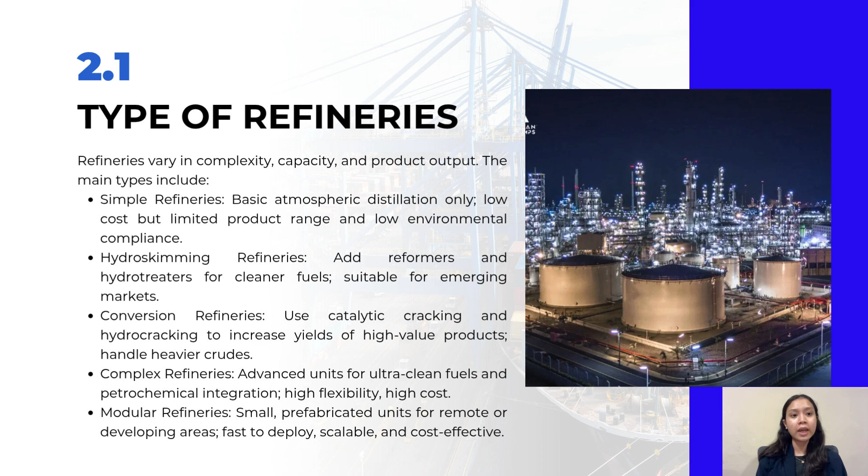Next is complex refineries, the most advanced type, combining features of the previous categories with additional units like alkylation and petrochemical integration. These are designed for high efficiency and strict environmental compliance. And lastly is the modular refineries, smaller prefabricated unit designs for remote or underdeveloped regions. They are cost-effective, rapidly deployable, and can be scaled up as demand grows.

Next, let's look at the key design aspects of modern refineries. Whether traditional or modular, design today is centered on improving efficiency, safety, and sustainability. Firstly, structural layout is critical for safe operations and future expansion. Traditional plants are spread out for hazard control, while modular refineries use compact, skid-mounted units for fast setup.

Next, process integration has advanced with energy-saving techniques like pinch analysis and hydrogen optimization to improve yield and reduce emissions. And lastly, digital technologies such as AI, digital twins, and model predictive control now help optimize operations, reduce energy use, and extend equipment life.

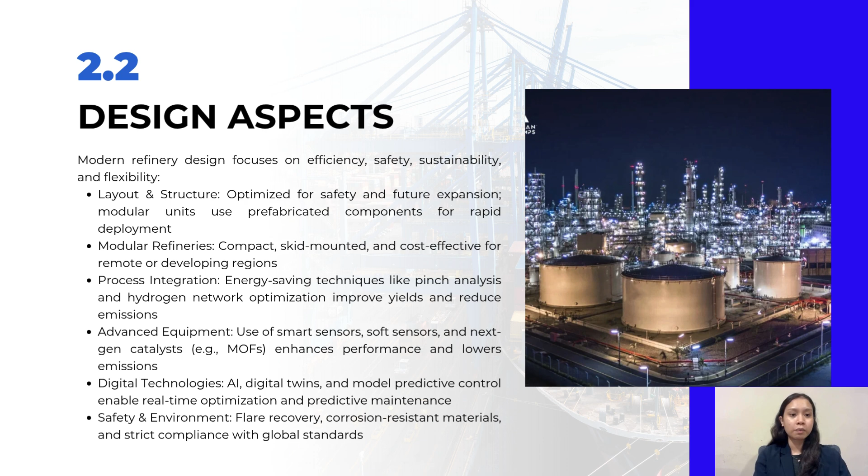Lastly is the construction techniques. Construction approaches vary significantly between offshore and onshore facilities, driven by environmental conditions and engineering requirements. Firstly is offshore platforms. These use fixed structures like jackets and gravity-based systems in shallow waters and floating platforms like TLPs in deeper regions. Suction caissons are used for foundations in deep water, and modular fabrication, where modules are built onshore and assembled at sea, helps reduce offshore construction time and improve safety.

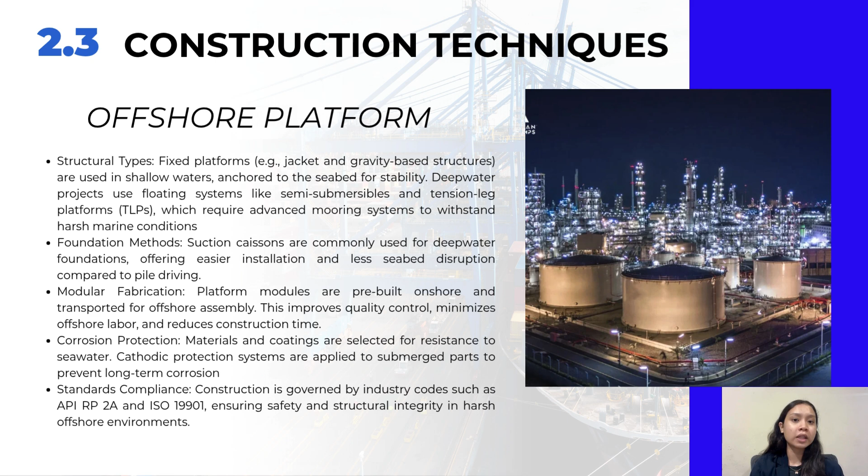Corrosion protection, cathodic systems, and compliance with international standards like API RP2A are vital for long-term durability. On the other hand is onshore plants. Construction has shifted from the traditional stick-built method to modular construction, where components like distillation units or pump systems are prefabricated and installed on-site. 3D modeling and crane planning tools improve logistics and safety. Onshore plants must meet ASME and API standards and integrate complex piping and instrumentation systems.

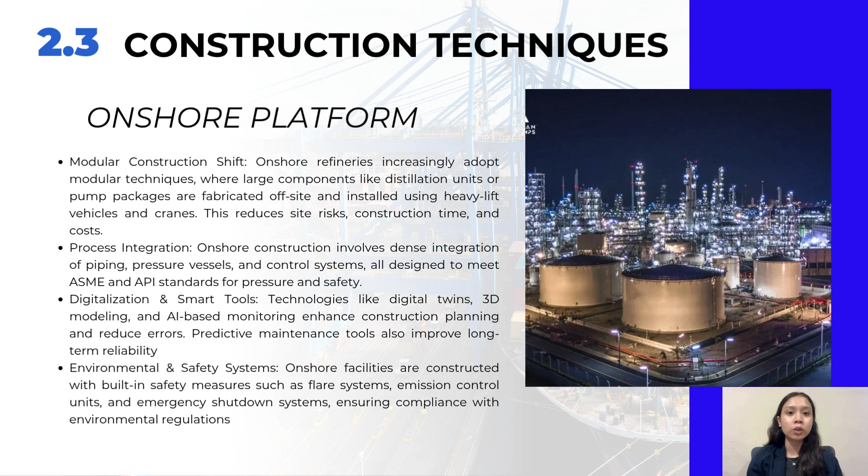Digital tools such as AI-based monitoring and digital twins are used not just during operation, but also throughout the construction phase for better planning and risk management. Environmental systems like flare control and emission treatment are also built into the construction process to meet regulatory demands.

Next, falsework and support systems. In offshore construction, falsework and support systems are temporary structures that provide stability and safety during the building of platforms. These systems are crucial because offshore environments face strong waves, wind, and sea currents. So for fixed platforms, jacket structures, falsework like guiding frames and drilling templates is used to align and support components before they are permanently installed.

For floating platforms such as TLPs, lifting frames help keep the structure stable during positioning. In subsea systems, falsework such as templates and guide frames help accurately place heavy equipment on the seabed with the help of divers. So overall, falsework ensures accurate placement, structural support, and worker safety during the early stage of offshore platform construction.

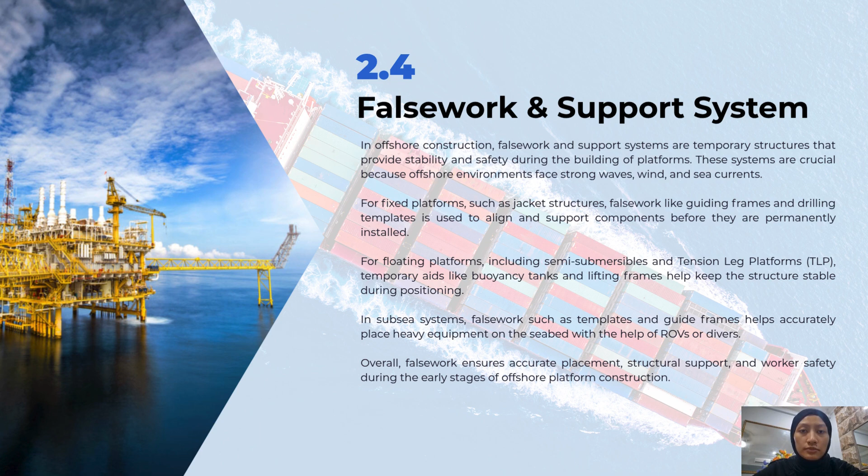Next, material use. Offshore platforms require materials that are strong, long-lasting, and resistant to corrosion due to harsh sea conditions, where different materials are used based on the part of the structure and its exposure to the water. First, steel is used for jackets, decks, and frames, in areas under heavy stress, where the steel needs protection from rust using coatings, galvanized finishes, or cathodic protection systems.

Second is concrete, which is mainly used in gravity-based structures (GBS) that rest on the seabed. It is often reinforced and has good resistance to seawater, making it a very protective barrier. Lastly, composite materials like fiberglass reinforced polymers are lightweight, rust-proof, and used for ladders, railings, and panels, and in pipeline and cable protection systems because they resist marine growth and chemicals.

To protect the materials, special coatings are needed. Anti-fouling and anti-corrosion coatings help extend the lifespan of underwater parts. New materials like smart coatings and nanotechnology are also being developed for better durability and sustainability in deep sea conditions.

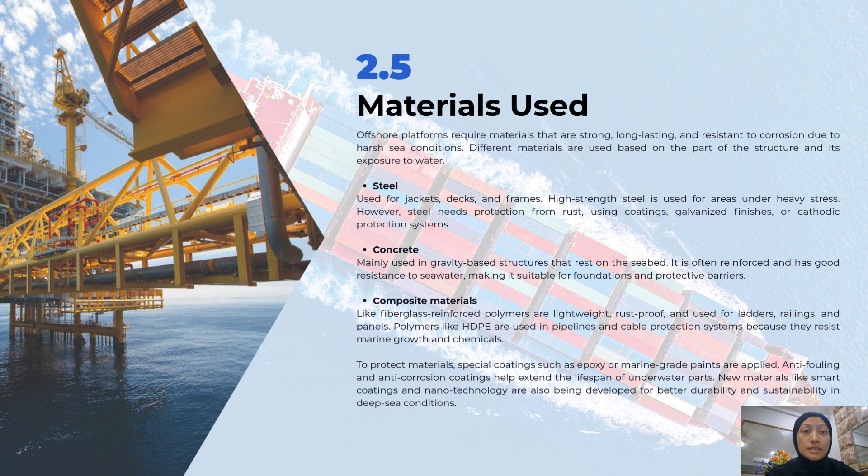Next, cost consideration. Offshore platforms are among the most expensive structures to build due to their remote location, complex design, and harsh environmental conditions, so managing this cost is crucial throughout the entire life cycle of the project from design to decommissioning. First, for water depth, fixed platforms are generally more cost-effective in shallow water, while floating platforms are needed in deep water, where they are more expensive due to their complex mooring and structural systems.

Material selection also influences the cost. High quality materials cost more initially, but they reduce long-term repair and maintenance costs and extend the platform lifespan. The third is transportation and installation, where special vessels and equipment are needed to move and assemble the large structure offshore, and delays due to bad weather or poor planning can further increase expenses.

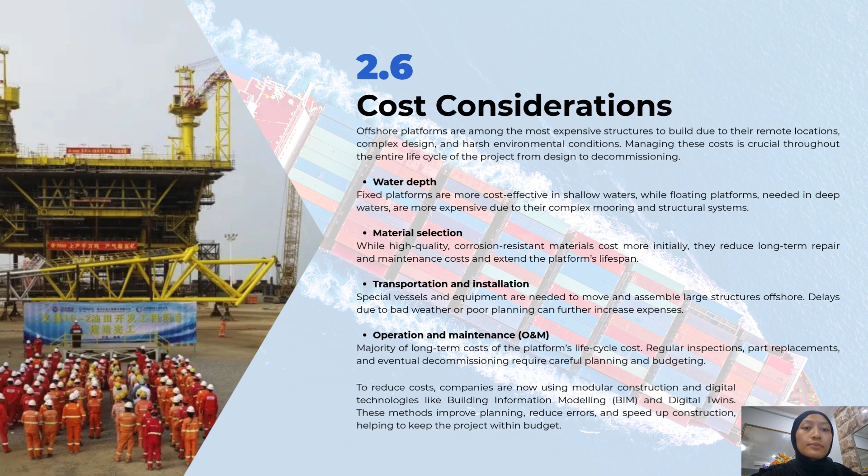Lastly is operation and maintenance (O&M), the majority of long-term platform life cycle costs, where regular inspection, part replacement, and eventual decommissioning require careful planning and budgeting. Overall, to reduce costs, companies are now using modular construction and digital technologies like BIM and digital twins, which improve planning, reduce errors, speed up construction, and help keep the project within budget.

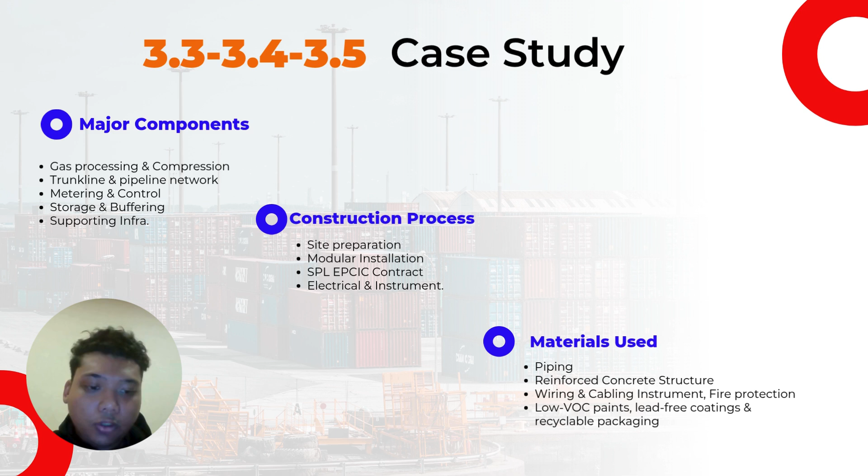For 3.5, it is the materials used in this case study. Firstly is piping, followed by reinforced concrete structure. And for the wiring and cabling instrument, they use copper wiring and fiber optic cabling, and also include hazardous area enclosures. And also there is fire protection such as intumescent coatings and non-combustible insulation. And lastly, in order to keep up with sustainability, they include low VOC paints, lead-free coatings, and also recyclable packaging.

Moving on, next is the challenges and resolutions. For the Petros Gas Hub in Bintulu, there are various challenges faced by the company. The first one is the pipeline decommissioning. The 500-kilometer long pipeline that transports natural gas from Kimanis Sabah to Bintulu Sarawak reported to have frequent leakage, in which one of the incidents led to a fatal one. This problem may cause Petros and other companies that benefit from this pipeline to lose some of their profit. So, to mitigate this problem in the future, these companies may need to implement a monitoring system that can detect possible leakage. By doing so, any unwanted incidents may be mitigated in the future.

Other than that, there are also the disputes between Petros and Petronas over claims over gas rights and operations. These disputes not only cause confusion and legal conflicts, but also disturb the daily operations and progress of oil and gas projects in Bintulu. Fortunately, the disputes have been resolved peacefully, where both parties mutually agree to acknowledge Petros as the sole gas aggregator in Sarawak.

Next is the environmental concerns. This kind of project, where it involves drilling of seabed to find crude oils and processing of crude oils into other products, has significant impact towards the environment. The impacts include global warming due to carbon and methane emissions, and endangerment of animals due to loss of habitat from land use changes nearby ecologically sensitive areas. To resolve this problem, the Department of Environment instructed Petros to conduct environmental impact assessment to ensure mitigation of environmental harm while complying with national regulations.